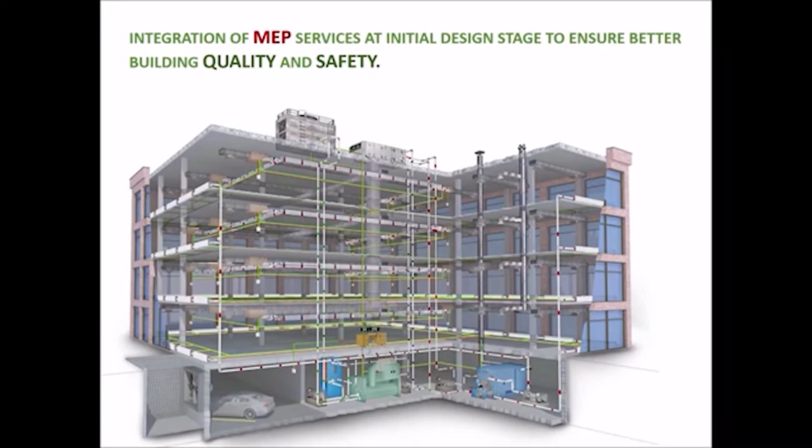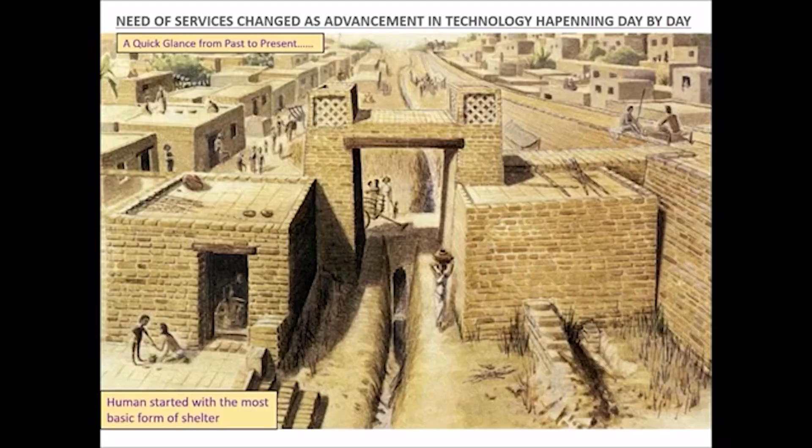Need of services changed as advancement in technology happening day by day. A quick glance from past to present. Humans started with the most basic form of shelter. The shelter evolved with increasing needs and progress in building materials. New materials thrived in the market. With the invention of breakthrough technologies in AEC - architecture, engineering and construction - buildings expanded vertically and skyscrapers came into existence.

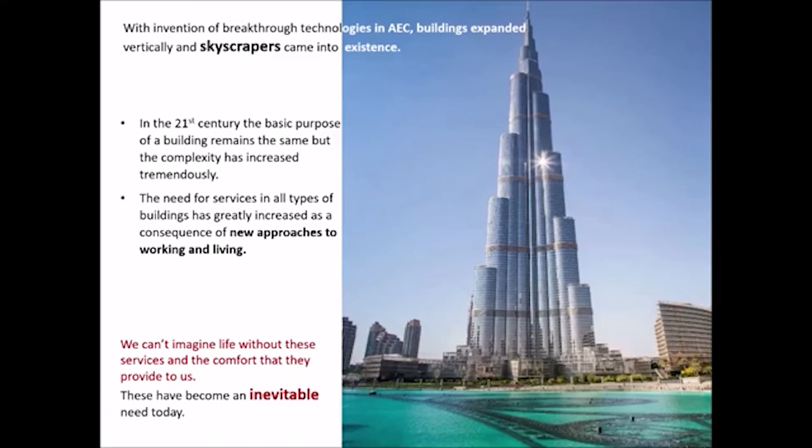In the 21st century, the basic purpose of a building remains the same, but the complexity has increased tremendously. The need for services in all types of buildings has greatly increased as a consequence of new approaches to working and living. We can't imagine life without these services and the comfort that they provide to us. They have become an inevitable need today. And now we have buildings with complex functions and services like malls, hotels, and hospitals.

Our comfort, building operation economics, building life cycle is now largely dependent on how effective these MEP services are planned in a building. Proper MEP services integration enhances quality and safety of a building, hence a comfortable and safe environment can be achieved. Imagine life without all these.

Now there is need to talk about the key role players involved in the design decisions about the integration of services with the structure at initial design phases. The complexities of modern construction has given rise to the need for various professionals and specialists to come together and work as a team.

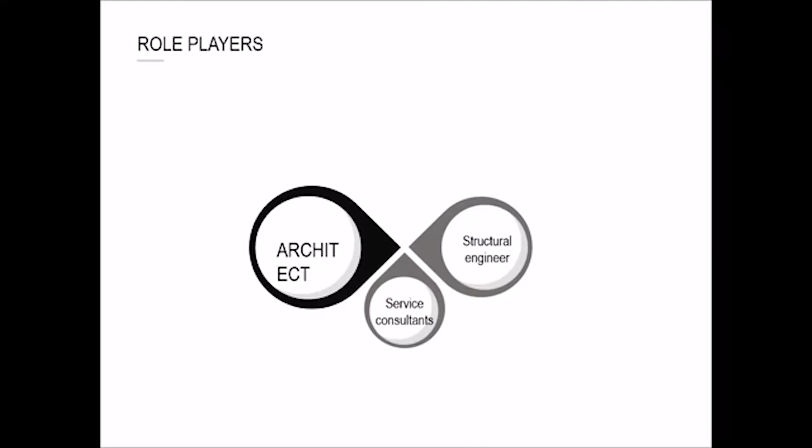They include architects, structural engineer, service consultants, clients. The designer and architect is responsible for proper coordination among the whole team.

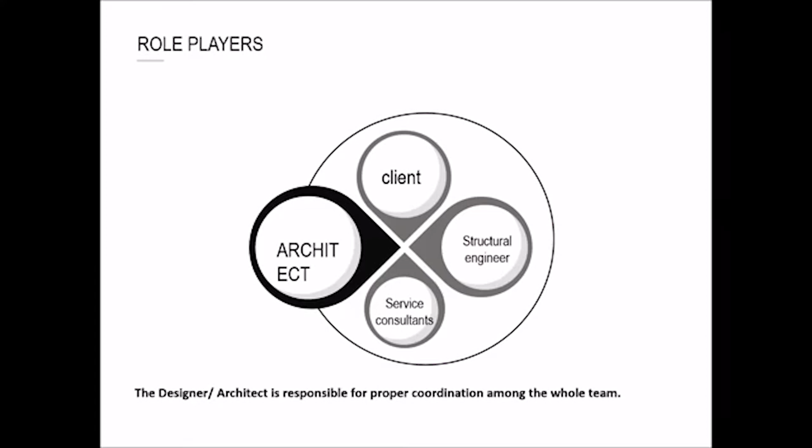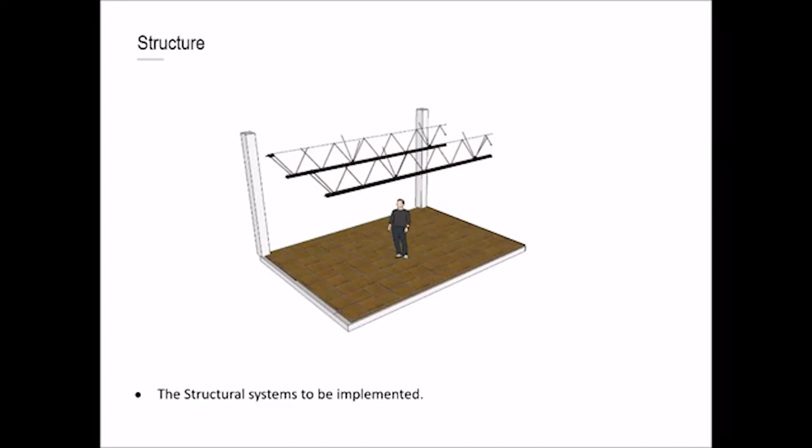What all should an architect consider and keep in mind while designing a building? The function of the spaces, the structural systems to be implemented, the services to be accommodated, the building envelope.

Among all above components, the structure and services integration plays the major role in building's quality and safety. The quality of the final product depends on how well these factors are integrated and brought together.

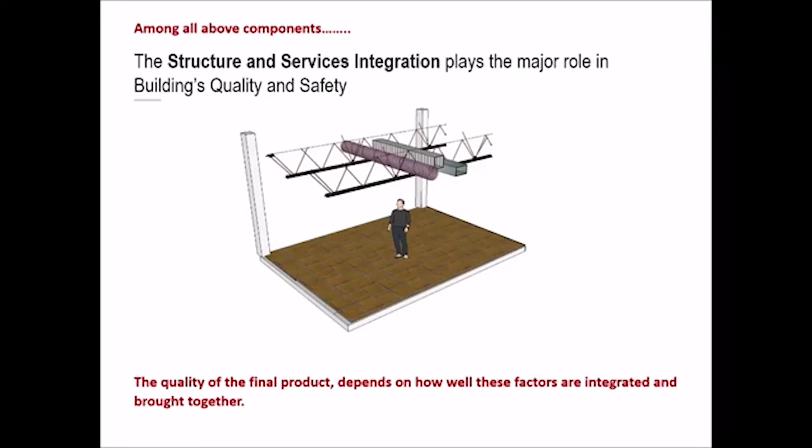After learning the key role players involved, we will learn the concept behind services integration and some ideal examples of services integration with the structure of the building.

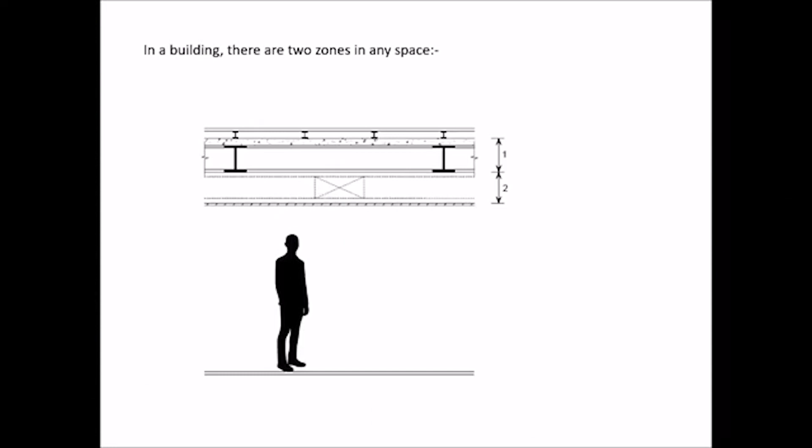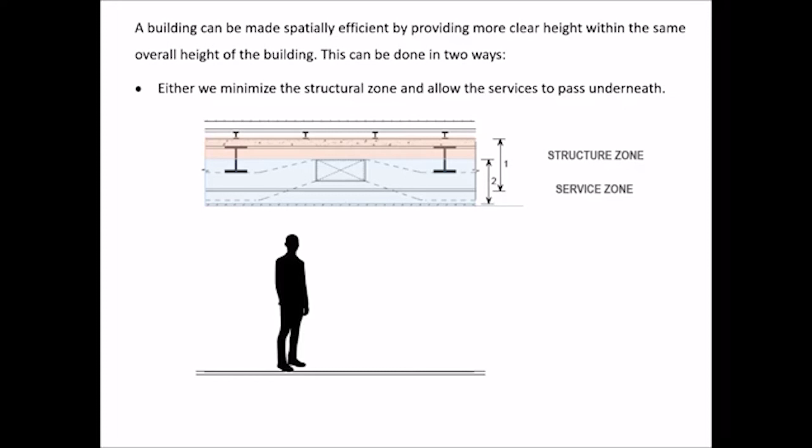So the methods of integration are: in a building, there are two zones in any space - first, structure zone, second, service zone. A building can be made spatially efficient by providing more clear height within the same overall height of the building. This can be done in two ways: either we minimize the structural zone and allow the services to pass underneath, or we accommodate the services within the structural zone, thereby combining the two zones.

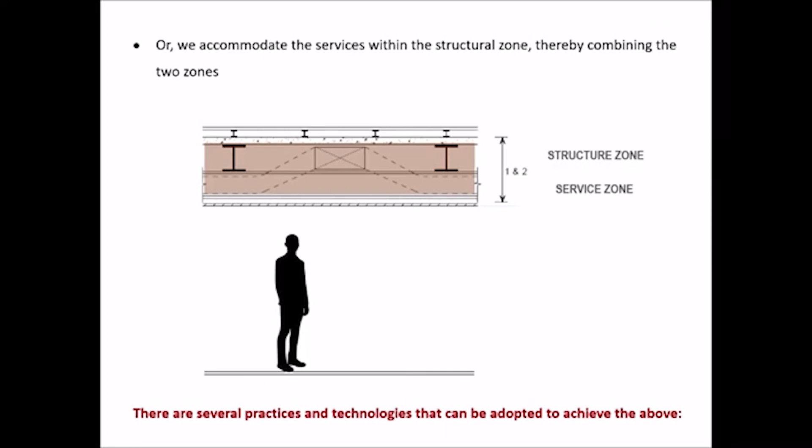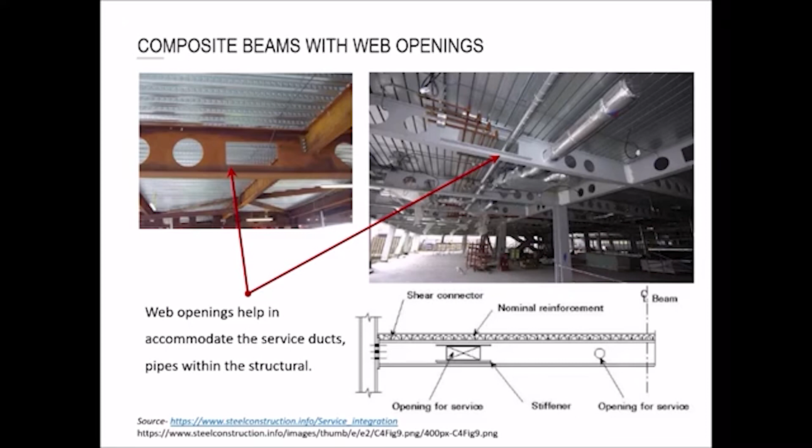There are several practices and technologies that can be adopted to achieve the above. Composite beams with web openings - web openings help in accommodating the service ducts and pipes within the structure.

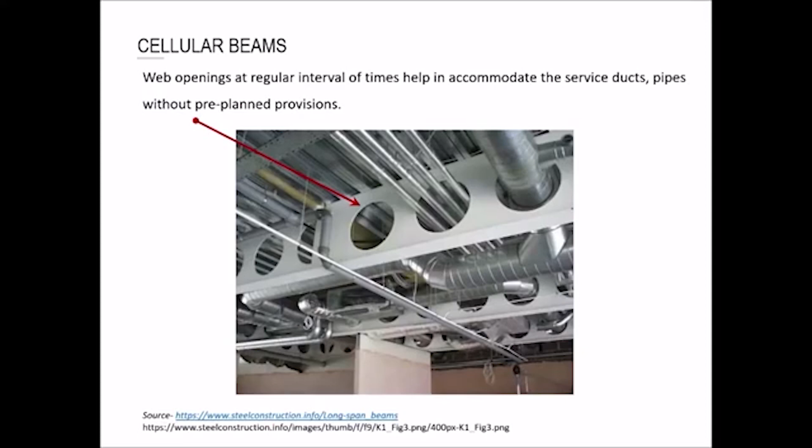Cellular beams have web openings at regular intervals which help in accommodating service ducts and pipes without pre-planned provisions.

Tapered beams have less depth at the ends, providing space for ducts and service pipes to go through by occupying the available depth of beams at the midsection.

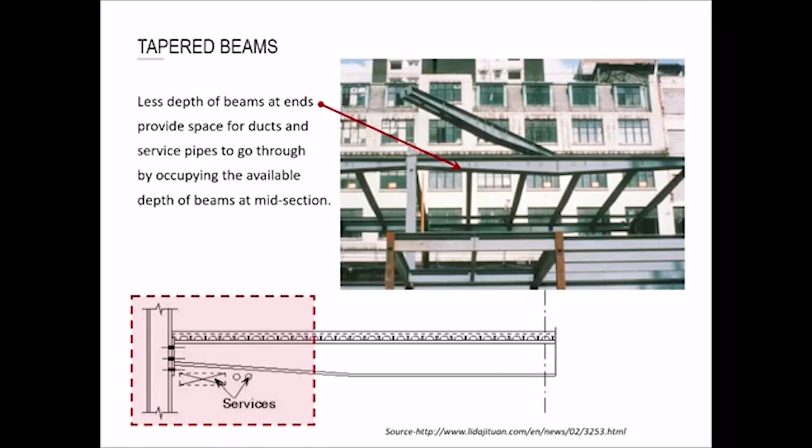Composite trusses have lots of intermediate spaces available for integration of services through them.

Flat slab system allows services to be accommodated within the structure zone. Hence, more headroom can be achieved within the same space, meaning more breathable volume is available.

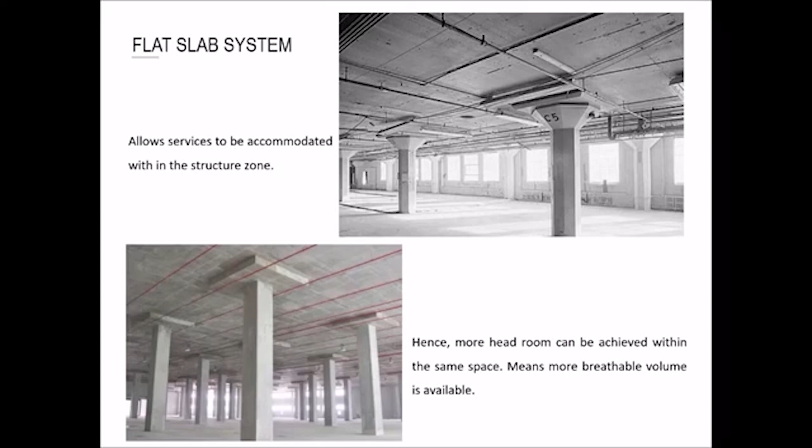Post-tension slab system: a building frame with post-tensioning will lower cost for the foundation, columns and shear walls, facade, cladding and MEP systems, and also will lower operating expenses because of the reduced building volume.

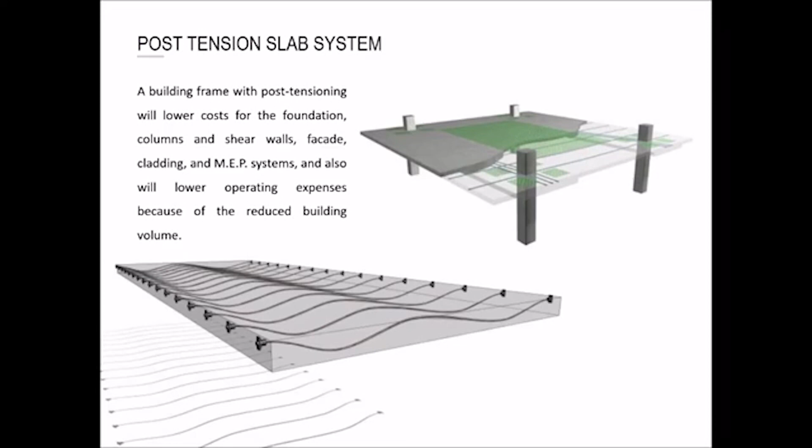Active chilled beam system. A chilled beam is a type of HVAC system based on convection designed to heat or cool large buildings, in which pipes of water are passed through a beam, either integrated into a standard suspended ceiling or suspended at a short distance from the ceiling of the room.

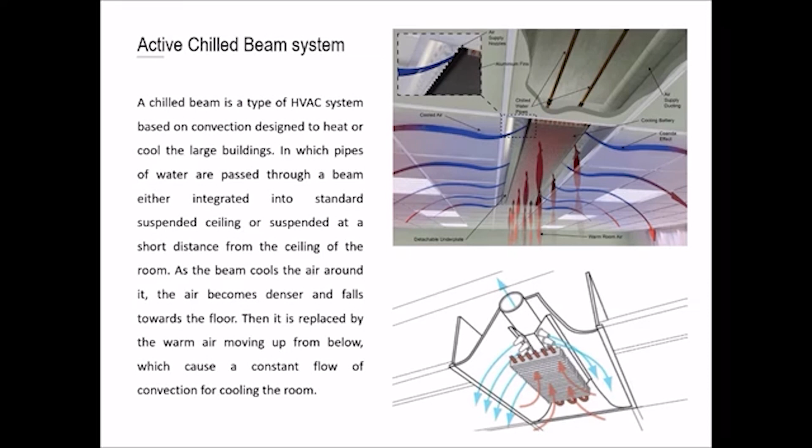As the beam cools the air around it, the air becomes denser and falls towards the floor. Then it is replaced by warm air moving up from below, which causes a constant flow of convection for cooling the room.

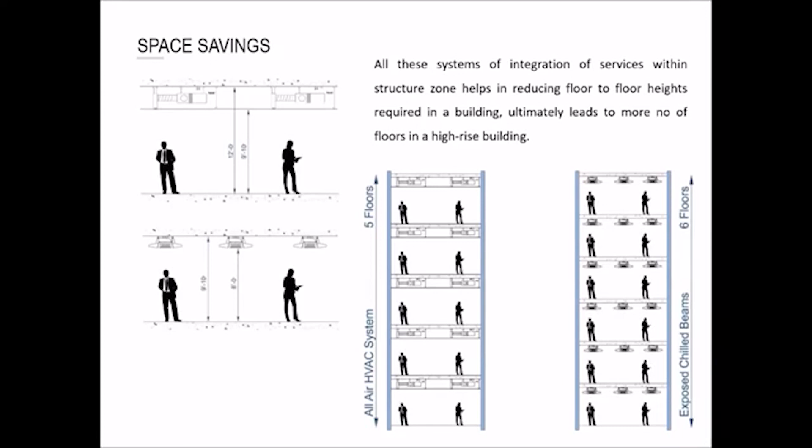All these systems of integrating services within the structure zone help reduce the floor-to-floor heights required in a building, ultimately leading to more floors in a high-rise building.

Talking about complex buildings like hospitals and hotels, one very important structural component is service floors. A service floor is a very good method that allows us to address various aspects of structure and services integration in a building. It is a floor provided whenever there is a need for change in structural grid and service requirements in complex buildings like hospitals and hotels.

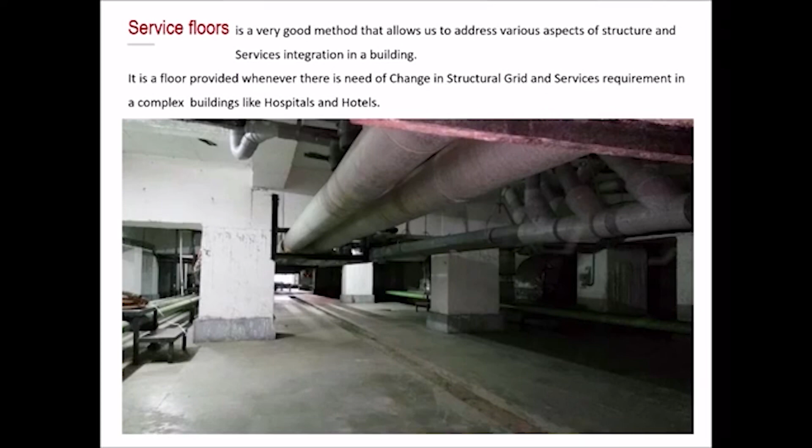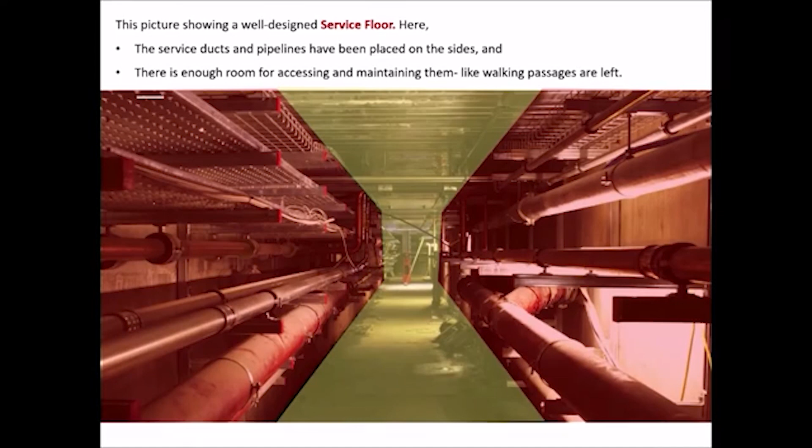This picture shows a well-designed service floor. Here, the service ducts and pipelines have been placed on the sides, and there is enough room for accessing and maintaining them, like walking passages left for access.

The National Building Code of India states that if the height of the service floor is kept up to 2.4 meters, then it is free of FAR, floor area ratio. This helps greatly in the incorporation and maintenance of services in a complex building.

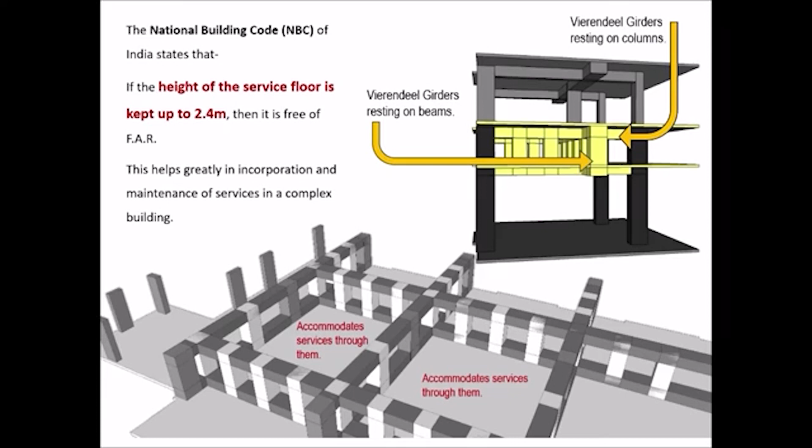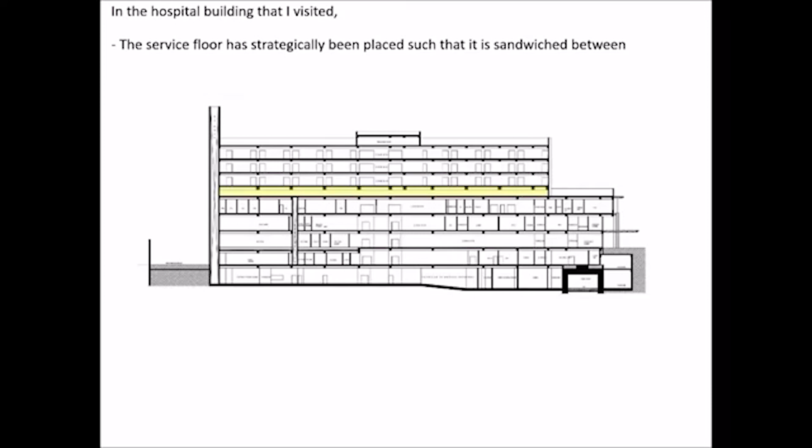In a hospital building that I visited, the service floor has strategically been placed such that it is sandwiched between the patient's rooms floors above and operation theaters below. The service floor also enables us to transfer services horizontally and vertically.

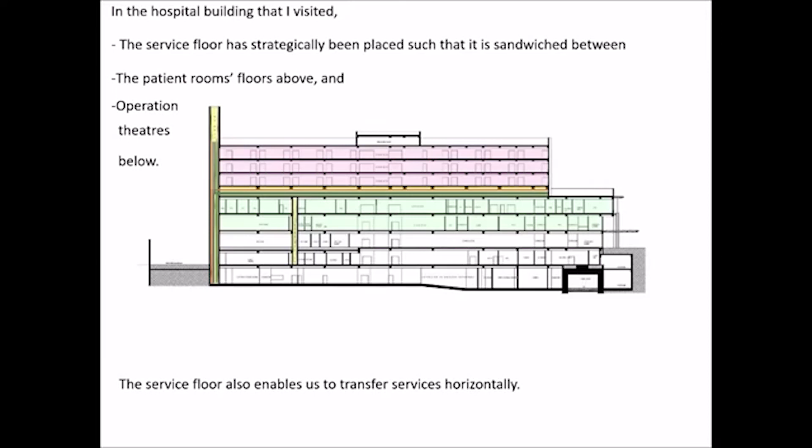Operation theaters require separate AHUs in order to maintain sterile conditions. By this strategic placement of the service floor, AHUs can be conveniently placed just above the operation theaters, thereby eradicating the need for ducts to run through large distances.

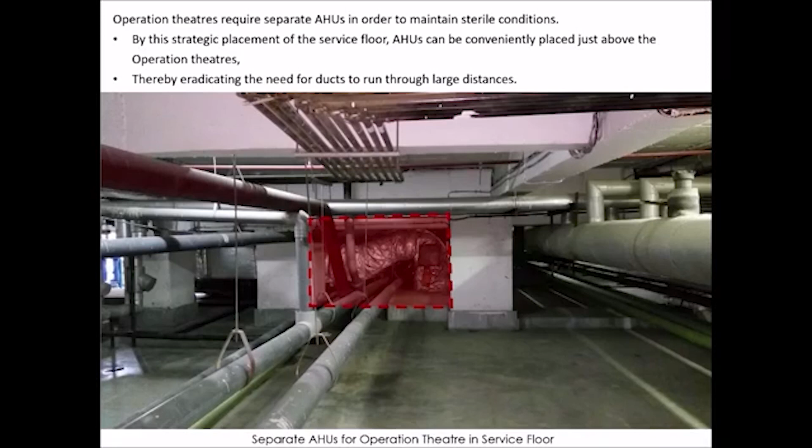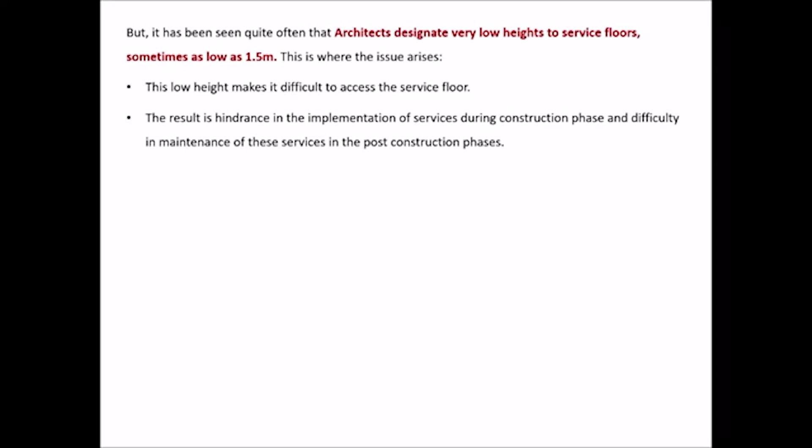But it has been seen quite often that architects designate very low heights to service floors, sometimes as low as 1.5 meters. This is where the issue arises. This low height makes it difficult to access the service floor. The result is hindrance in the implementation of services during the construction phase and difficulty in maintenance of these services in the post-construction phase.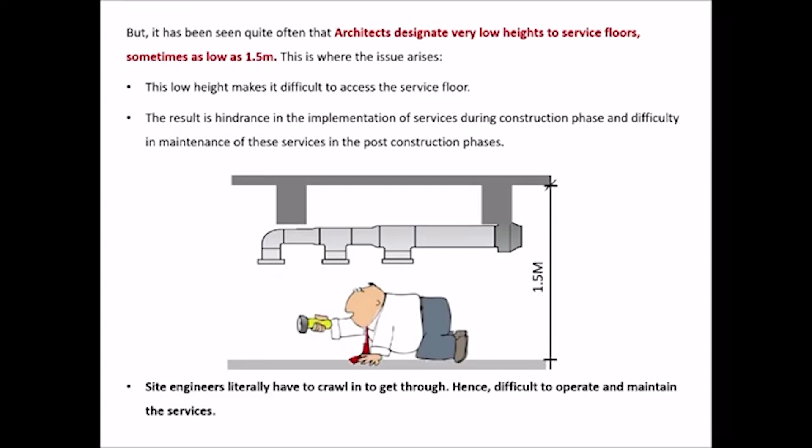Site engineers literally have to crawl in to get through, hence it is difficult to operate and maintain the service floors. These service floor pictures show pre-thoughts given to service integration, hence very few clashes between the services.

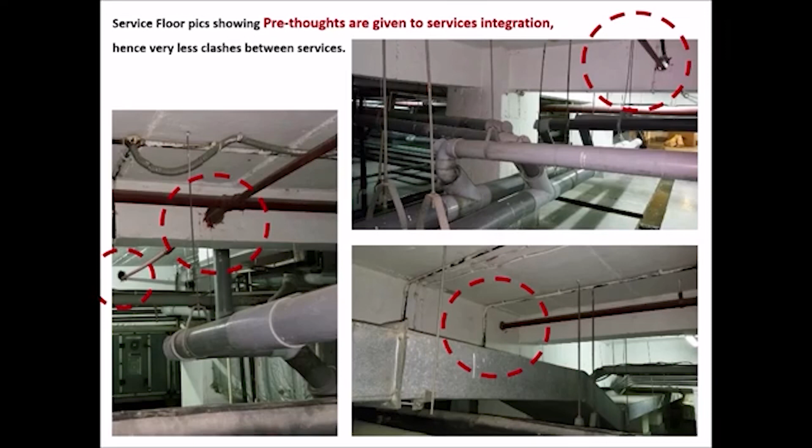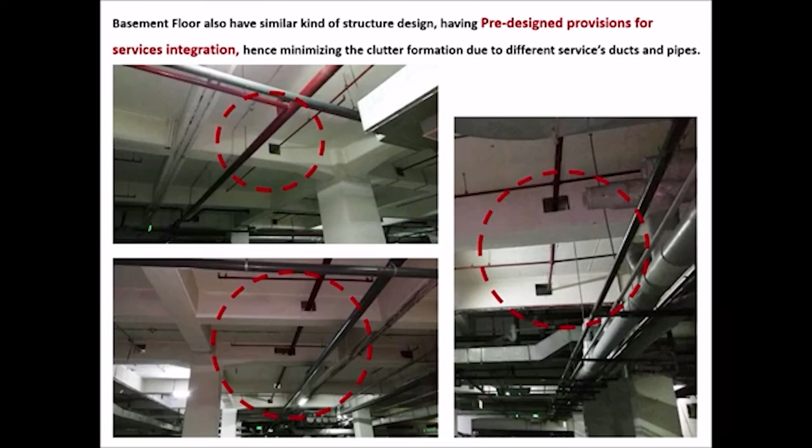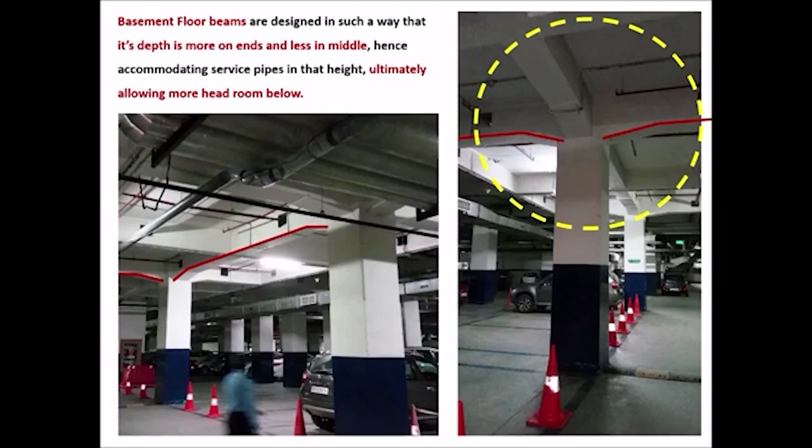Basement floors also have a similar kind of structural design, having pre-designed provisions for services integration, hence minimizing clutter formation due to different service ducts and pipes. Basement floor beams are designed such that their depth is more at the ends and less in the middle, hence accommodating service pipes in that height, ultimately allowing more headroom below.

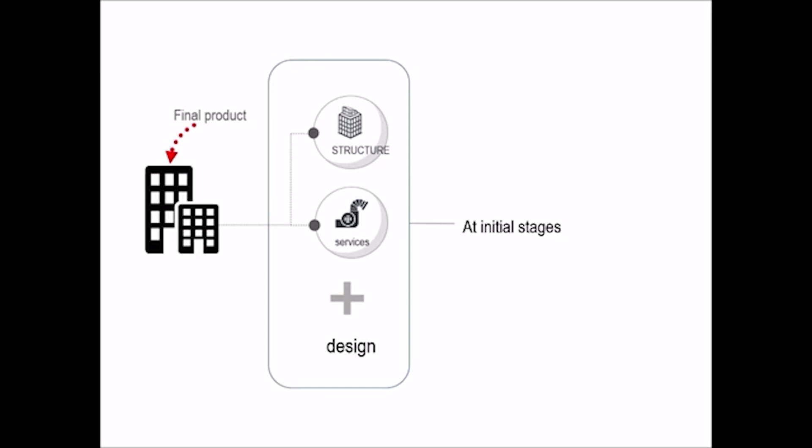So the conclusion is: building with structure and services combined at the design stage, at initial stages, the final product will have enhanced quality of building and safety of people. So the final product is efficient, comfortable, cost effective, easy to maintain, and flexible. Ultimately, it gives happy end users.

So this presentation is about the need for proper integration of building services with the structure of the building to have a neat and effective execution of services, as the right execution of services affects the building life cycle from construction stages to the post-construction phase, that is the operation and maintenance phase of the building also.

If any service has difficulty in its execution phase at construction time due to issues from design decisions, then it will surely be a problem in the future operation and maintenance of the building also, that is in the post-construction phase also. Hence it gives a degraded building quality and safety of people in a building.

So it is recommended that pre-thoughts should be given to the integration of MEP services with the building structure at initial design stages, to ensure better building quality and safety of people. Thank you.